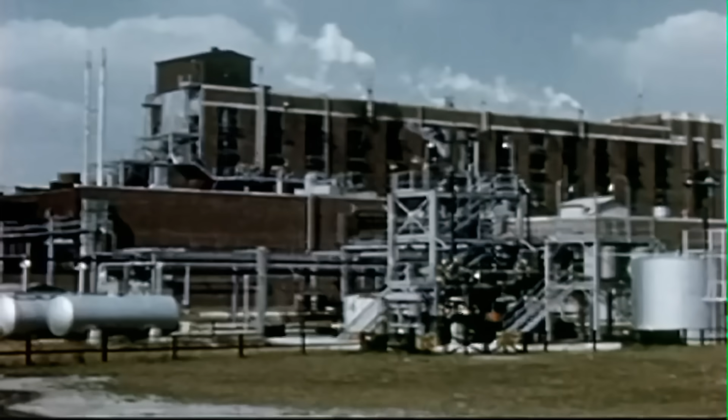The DuPont Company of Wilmington, Delaware, was founded in 1802 as a gunpowder manufacturer. By the early 20th century, DuPont had developed into a major chemical company and is today one of the largest chemical manufacturers in the world, with some 58,000 employees across 80 countries.

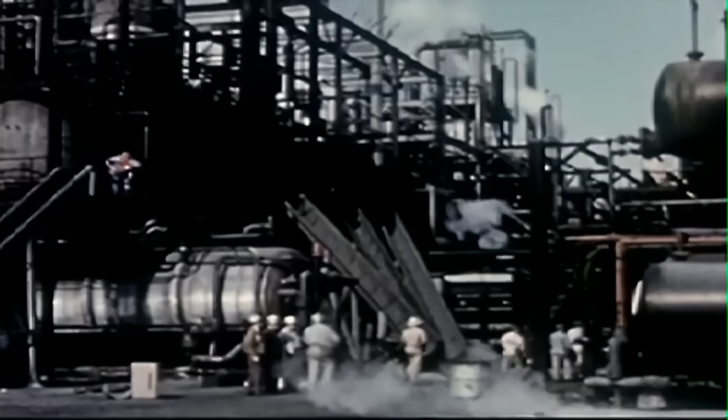DuPont has had a stated focus on accident prevention since its early days producing explosives. Over the years, DuPont management tried to drive the injury rate for workers to zero through improved safety practices. Eventually, DuPont became recognized across industry as a safety innovator and leader.

911. Yes, ma'am. My name's Deborah Stanley. I'm at the DuPont plant in Belle, West Virginia. I need an ambulance immediately.

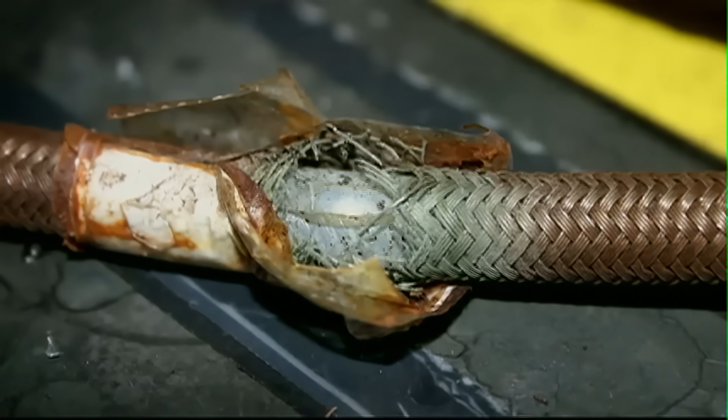But DuPont's safety reputation was shaken in January of 2010, when 3 separate incidents occurred within 33 hours at the company's manufacturing plant in Belle, West Virginia, the last one fatal. The first involved an ongoing release of methyl chloride from process equipment that went unnoticed for 5 days. The following morning, highly corrosive oleum was released through a hole in process piping, and just 6 hours later, a transfer hose ruptured, releasing highly toxic phosgene.

Given the company's reputation as a safety leader, the Chemical Safety Board was especially concerned about this quick succession of 3 accidents at a major DuPont facility. Particularly distressing was the fatal release of highly toxic phosgene.

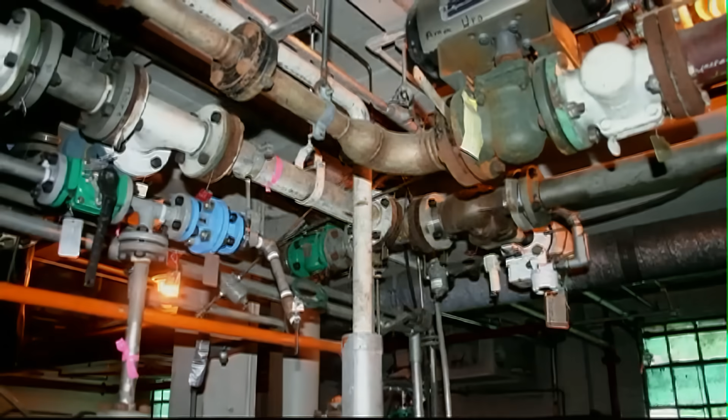DuPont's Belle, West Virginia facility occupies more than 700 acres along the Kanawha River, 8 miles east of Charleston, the state capital. The plant produces a variety of chemicals. On January 17, 2010, one production unit was started up after extended maintenance. Methyl chloride produced in a reaction vessel flowed through an open rupture disc and escaped from an improperly located drain hole. The hazardous gas vented indoors in an area not frequented by workers.

5 days later, on January 22nd, an air monitor alarm inside the building alerted personnel of the release. Approximately 2,000 pounds of methyl chloride had escaped. When the rupture disc burst, an alarm was triggered. But our investigation found that due to a history of false alarms, operators came to view this alarm as a nuisance that could safely be ignored.

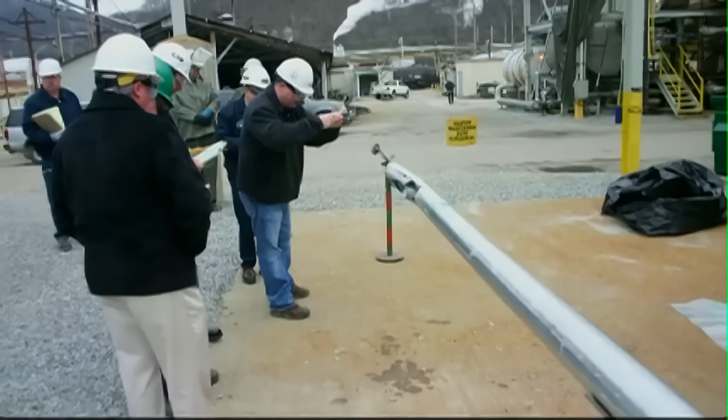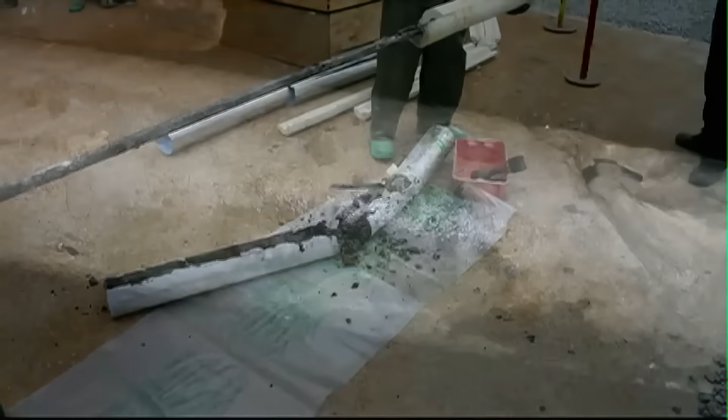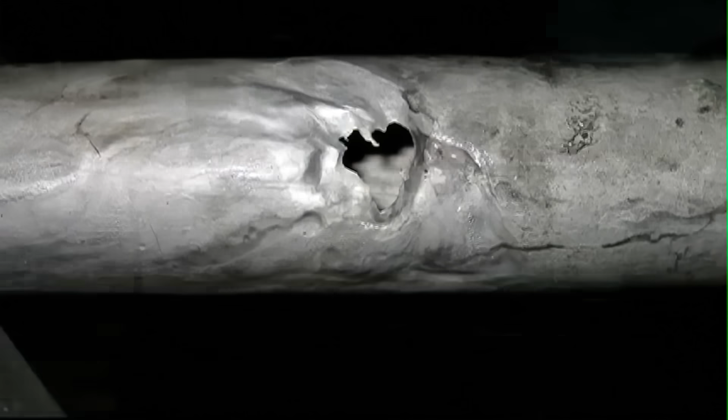The following day, plant operators discovered another release. Oleum, a concentrated form of sulfuric acid, had over time corroded piping in the plant's spent acid recovery unit. Steam from an attached copper tube mixed with the oleum and created a large hole in the pipe. Oleum escaped through the hole and formed a vapor cloud, discovered by workers shortly after 7 a.m. on January 23rd. Approximately 22 pounds of oleum was released.

The CSB found that DuPont had a previous oleum leak, resulting in a company recommendation to conduct regular maintenance inspections of the oleum piping. But the CSB found this was not done due to ineffective communications between DuPont and its inspection contractors.

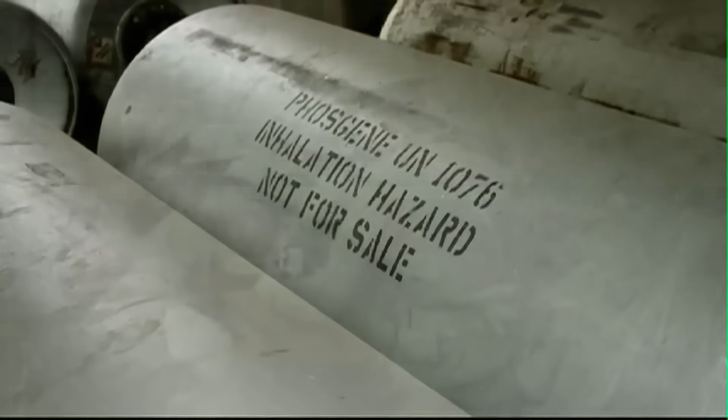The third in the series of accidents at the Belle plant came just 6 hours after the oleum release, and it would prove fatal. It involved phosgene, an industrial chemical so toxic it was used as a chemical weapon in World War I. Phosgene severely damages lung tissue. This can result in a deadly buildup of fluid in the lungs, which may not appear until hours after exposure.

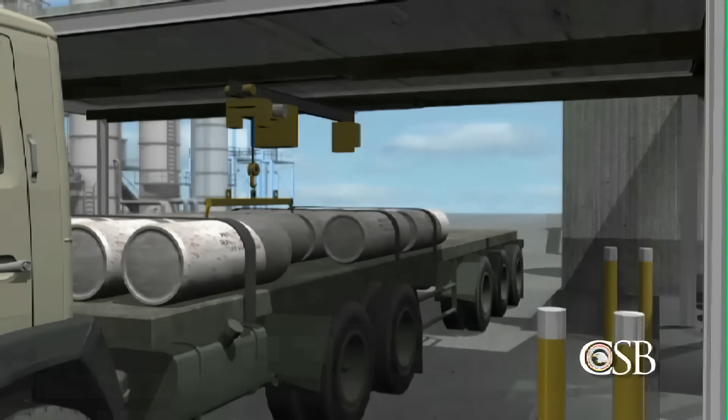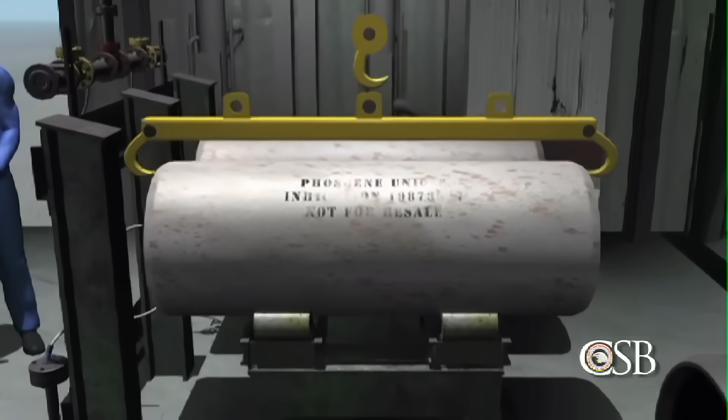The Belle plant's small lots manufacturing unit purchased phosgene in 1-ton cylinders from an outside chemical company. The plant used the phosgene to manufacture 5 different pesticide intermediates. The cylinders were stored in a 1-story, partially walled structure called a phosgene shed, which was open to the atmosphere.

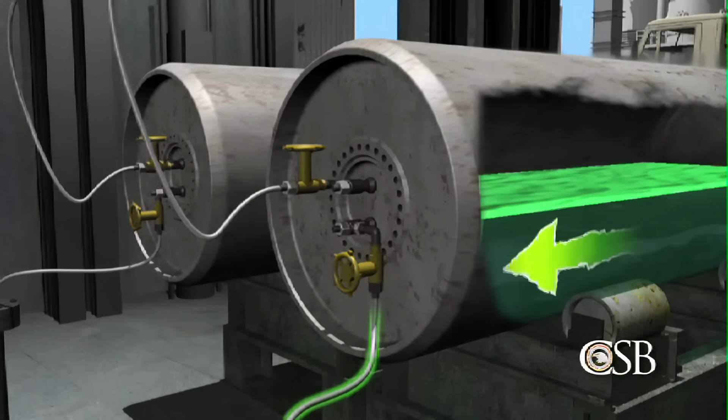During use, the cylinders were connected to other equipment by flexible braided stainless steel hoses. Inside each hose was a liner made of Teflon, or PTFE. One hose used nitrogen to pressurize the cylinder, pushing the liquid phosgene into the manufacturing process. An electronic scale recorded the weight of each cylinder, and when it was nearly empty, an alarm sounded in the control room.

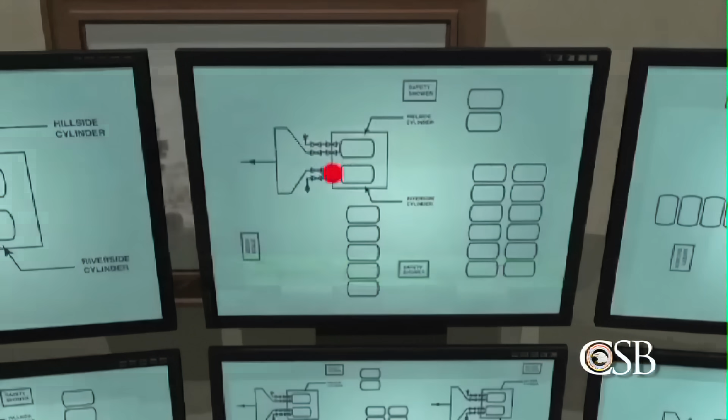An operator then closed valves to the empty cylinder and opened valves to a second, full cylinder. The stainless steel hoses to the empty container were purged of phosgene with nitrogen. The empty cylinder was then replaced with a new one on the weigh scale.

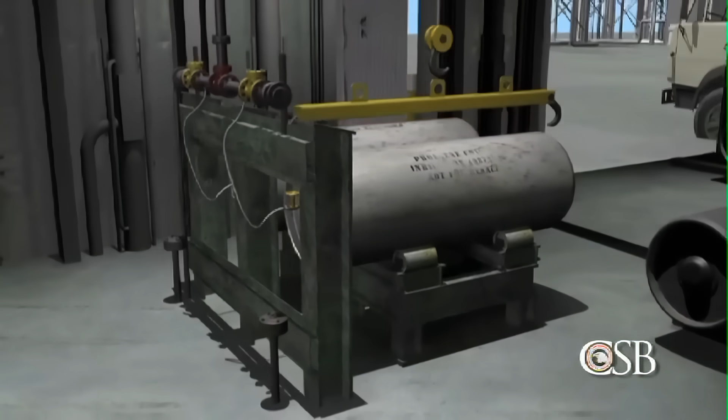On the day prior to the fatal phosgene release, operators were experiencing flow problems with one of the hoses and began switching between cylinders to avoid disruption to the chemical process. In the course of switching cylinders, the valve was closed on a partially full cylinder. However, the hose was not purged, allowing pressure to build as the liquid phosgene inside warmed up.

Sometime between 1:45 and 2 p.m. on January 23rd, a worker was inspecting one of the cylinders when the pressurized hose suddenly burst. He was sprayed across his chest and face with a lethal dose of phosgene. Another worker was exposed to the deadly gas, and a third was potentially exposed, but neither reported any symptoms. A total of 2 pounds of phosgene was released to the atmosphere.

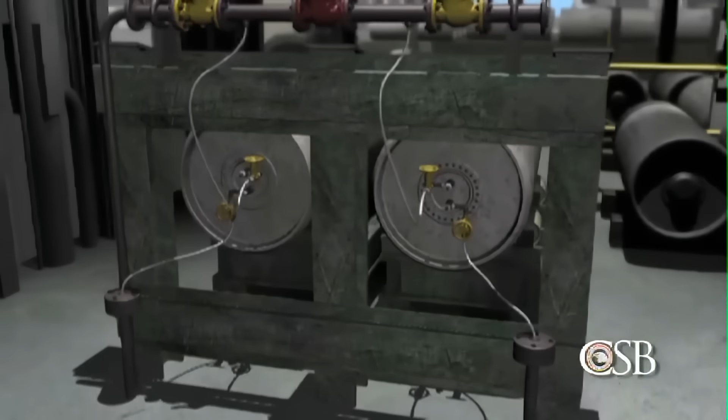Small concentrations of the dangerous chemical were detected by monitors at the plant's fence line. The worker who had been sprayed with phosgene called for help and was transported to a local hospital. 4 hours later, the worker's condition began to deteriorate rapidly, and despite medical treatment, he died a day after the accident.

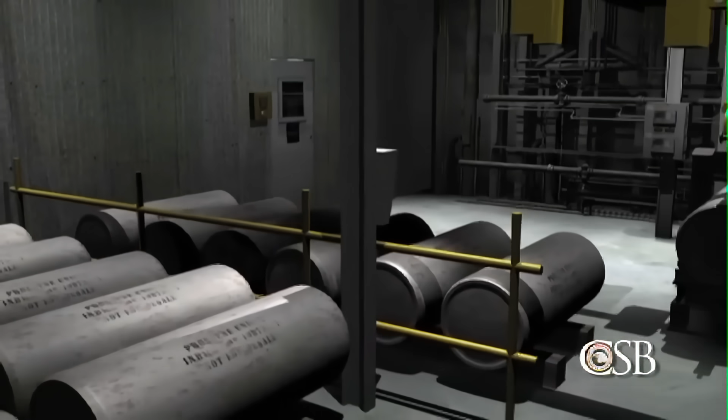The CSB found the permeability of the transfer hoses to phosgene was a key factor in the accident. During our investigation, we found that the PTFE-lined stainless steel hoses in use at the Belle plant are particularly susceptible to failure when using phosgene. That is because the phosgene can seep through the permeable PTFE lining and corrode the stainless steel. We also learned that another phosgene hose nearly failed in the same manner and was discovered just hours before the fatal phosgene release, but this did not prompt an investigation.

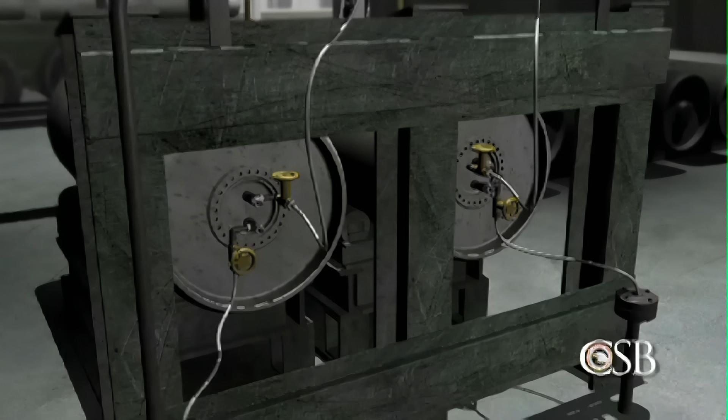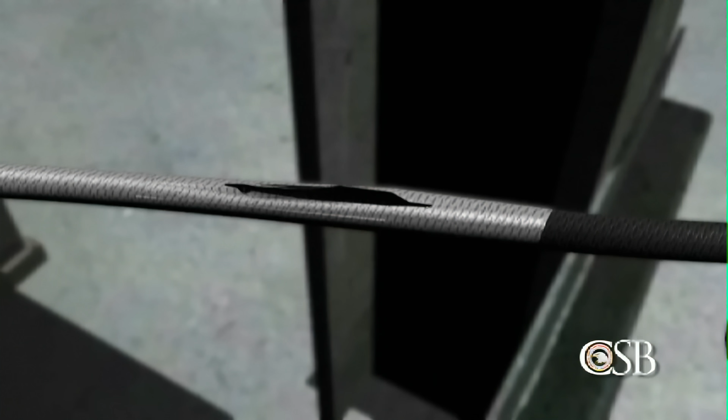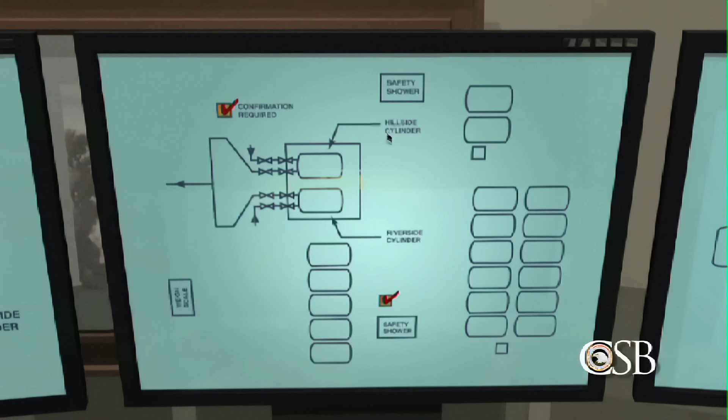DuPont's standard operating procedure requires replacement of hoses in phosgene service every 30 days. However, by the day of the accident, January 23, 2010, the phosgene hoses had not been changed in over 7 months. The software used to manage maintenance at the Belle plant had been modified, and it no longer notified operators when to replace the hoses. As a result, the hoses remained in use much longer than the prescribed service life.

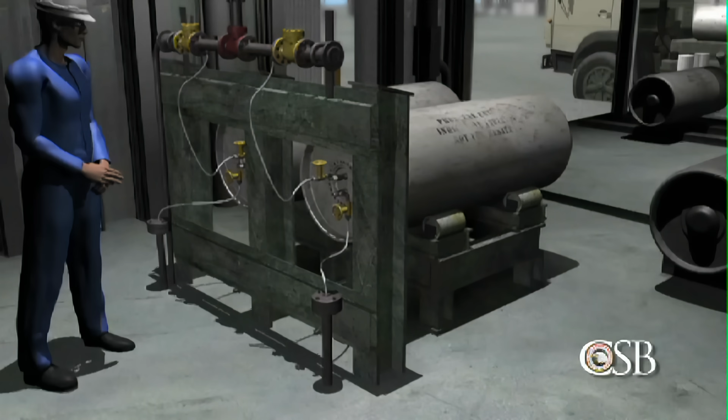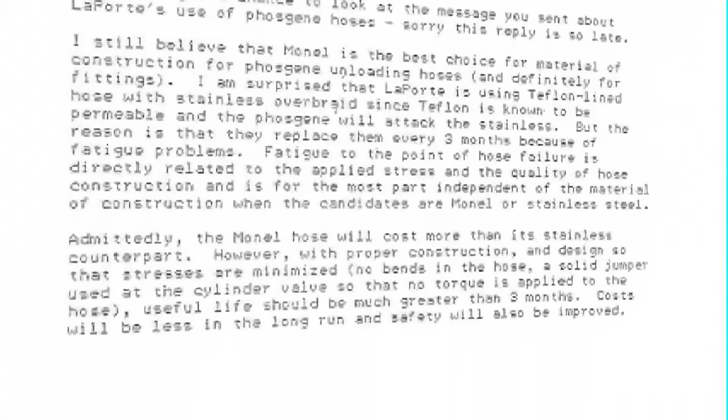Documents obtained during the CSB investigation showed that as far back as 1987, DuPont officials realized the hazards of using the braided stainless steel hoses lined with Teflon or PTFE. An expert employed at DuPont recommended the use of hoses lined with Monel, a strong metal alloy used in highly corrosive conditions. The DuPont official stated, "Admittedly, the Monel hose will cost more than its stainless counterpart. However, with proper construction and design so that stresses are minimized, useful life should be much greater than 3 months. Costs will be less in the long run, and safety will also be improved." But the CSB found that the Belle plant never followed the recommendation to install the more durable Monel hoses.

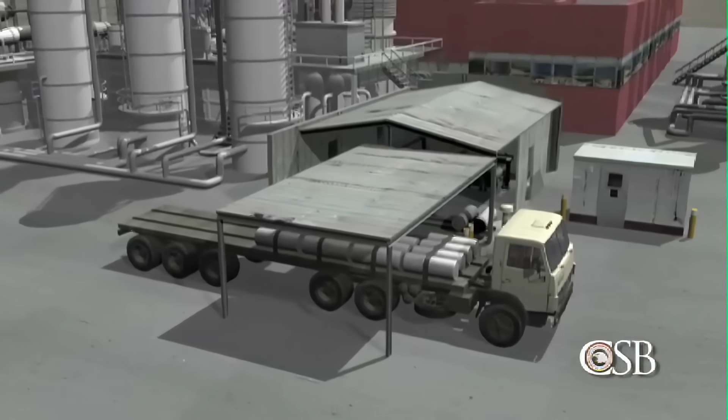The CSB determined there are safer ways that DuPont could have run its phosgene operation. For example, phosgene cylinders should have been kept in an enclosure equipped with a ventilation system and a scrubber. If the enclosure were designed for human entry, workers should have been required to wear fully encapsulated protective equipment.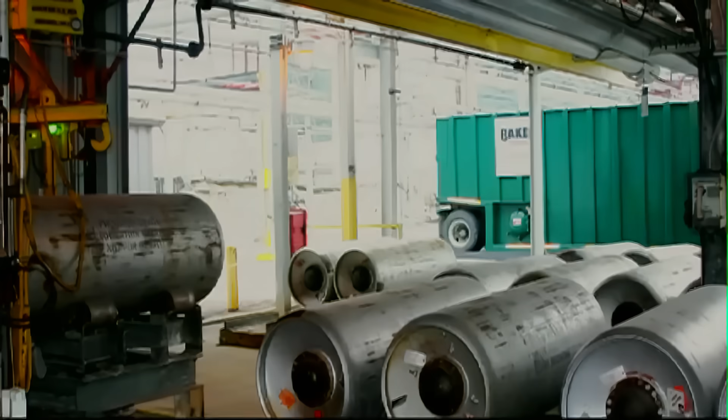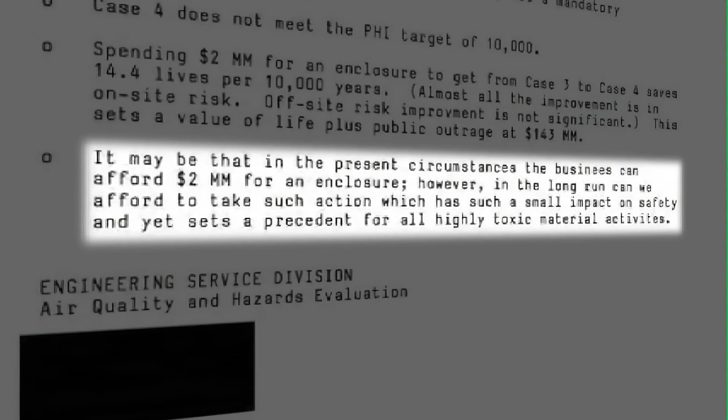Documents from 1988 show that DuPont considered building an enclosure for the phosgene operation, but then decided against it. One DuPont official wrote, "It may be that in the present circumstances the business can afford $2 million for an enclosure. However, in the long run, can we afford to take such action which has such a small impact on safety and yet sets a precedent for all highly toxic material activities?"

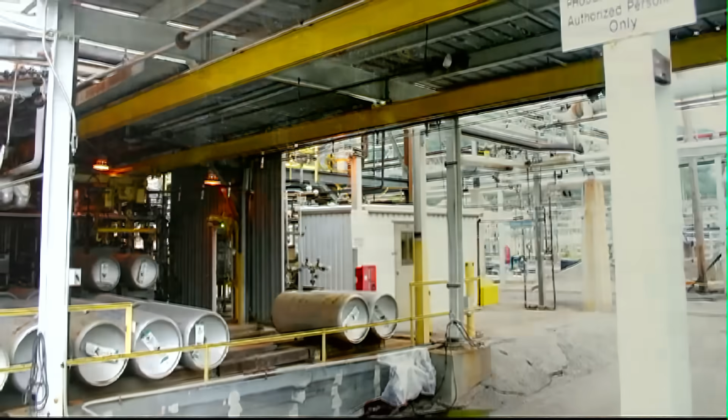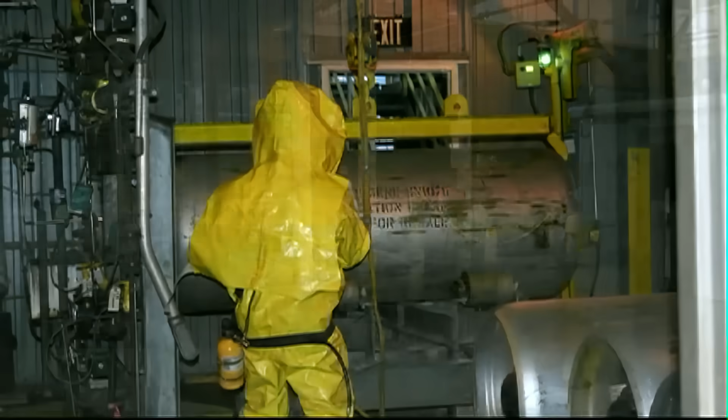DuPont decided not to enclose the phosgene unit at that time, but the potential for a deadly release remained a concern. The danger was noted in a 2004 process hazard analysis, which recommended constructing an enclosure equipped with a scrubber. Originally, the enclosure was scheduled to be completed by December 2005, but the deadline was extended 4 times and still had not been met in January 2010, when the fatal phosgene release occurred. Without an enclosure around the phosgene operation, no barriers were present to prevent phosgene from exposing operators or traveling off-site.

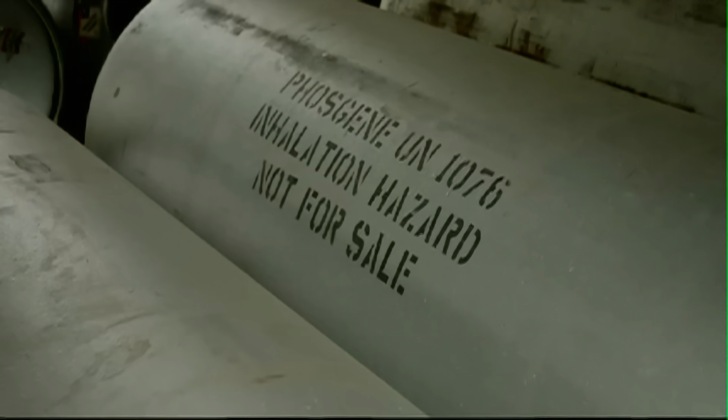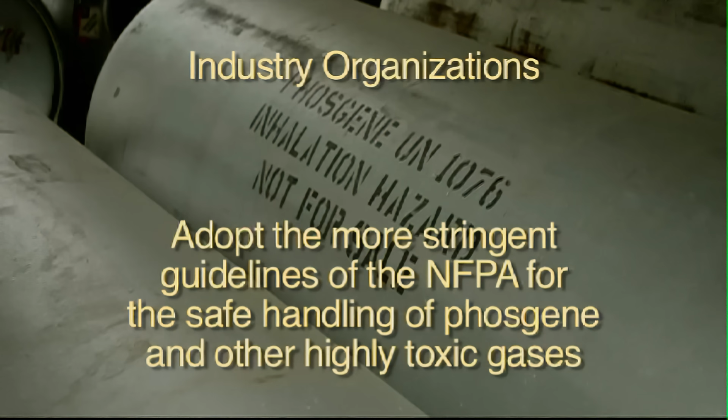Industry groups have established various good practices for the safe handling of phosgene and other highly toxic materials in compressed gas cylinders. The CSB found that the most comprehensive guidelines are those set forth by the National Fire Protection Association, or NFPA. The CSB recommended that industry organizations such as the Compressed Gas Association and the American Chemistry Council adopt the more stringent guidelines of the NFPA for the safe handling of phosgene and other highly toxic gases.

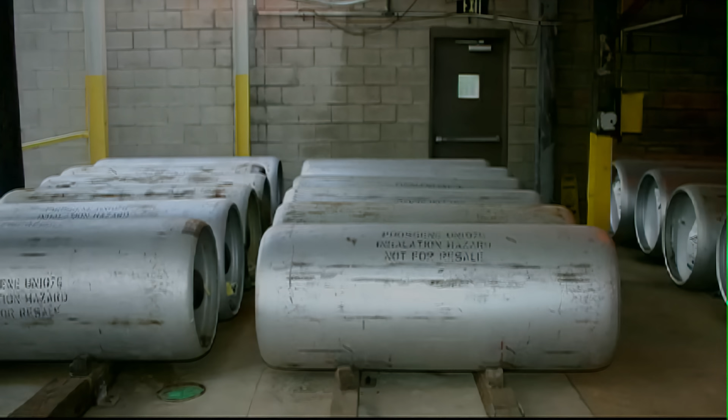And the CSB called on OSHA to update its compressed gas safety standard to include modern safeguards for toxic gases. The CSB recommended these improved safeguards include secondary enclosures for units using phosgene, mechanical ventilation systems, emergency phosgene scrubbers, and automated audible alarms.

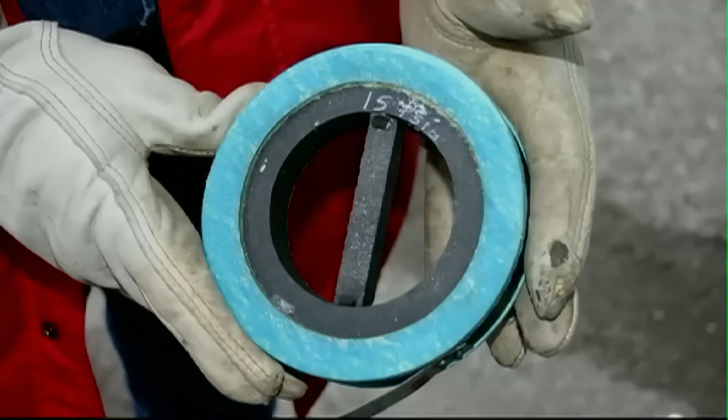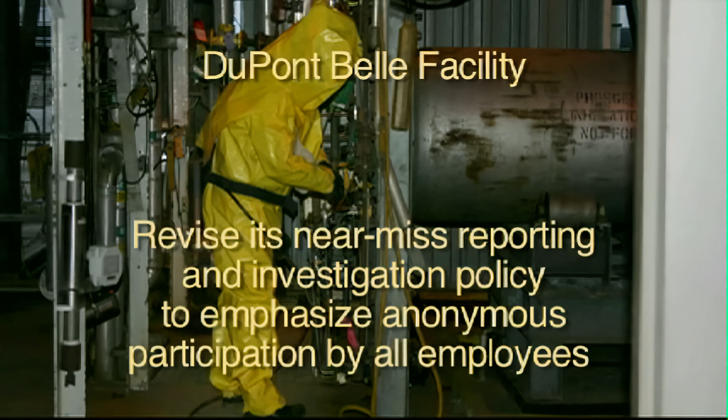We found that each of the 3 serious incidents at DuPont's Belle plant was preceded by another event or series of events. However, these early warnings and near misses did not result in action to prevent them from recurring. The CSB recommended that the DuPont Belle facility revise its near-miss reporting and investigation policy to emphasize anonymous participation by all employees so that minor problems can be addressed before they become serious.

The incidents at DuPont show that tragedies can occur even at companies with highly regarded safety cultures. Safer practices and proper attention to near misses are critical if a company is to reach a zero incident goal, such as the one to which DuPont aspired.